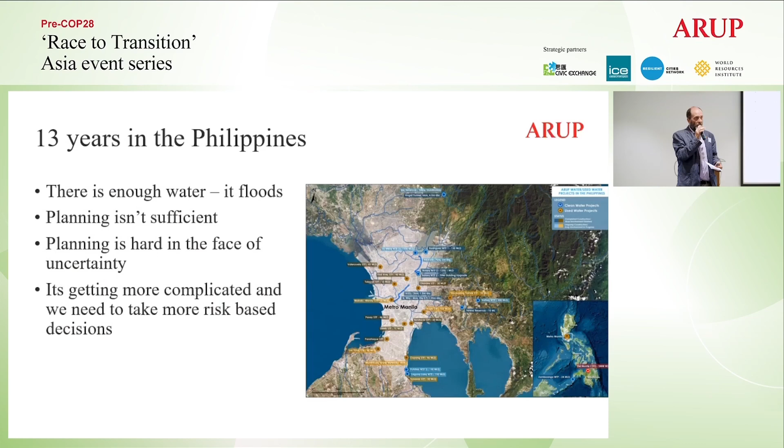It's getting more complicated as we move forwards. The risks are harder to understand, and how we plan our way through that is where I think we can make a real difference. Our work is changing. This image shows a number of projects we've worked on all over Metro Manila and outside of it in the Philippines. But the work is changing, and we need to be doing different things. That's partly why we have everyone here today, to discuss that.

So, what is water, what could water be, and where has it taken us? We know that water does more than just water - it can be a source of energy, sludge processing, pineapple processing. I have that up because we worked on another project in Mindanao a few years ago, and I know Dietmar knows this one very well. Mark did a presentation at Stockholm Water Week about 10 years ago where he described the water cycle and how we generated energy, describing Sven the woodcutter, who somehow ended up in the Philippines generating energy from pineapples. I hope his presentation tonight doesn't repeat that one, but it should be of that sort of nature.

But are there other options? Could we use it for hydrogen production? So really, what is the total value of water, and how do we use that in a fully integrated way? And what we're going to do now is look at where this vision could take us.

I hope this isn't Manila Bay, but hopefully in a few years' time, the long-term vision would be for Manila Bay to look like this, somewhere we'd be happy to go. I've just got back from Singapore, and you're very happy to have a drink by Marina Bay. We don't have that in the Philippines, and I think that's what we'd be looking for if we get all this right - a fully working environment fitting for something we can make the most of.

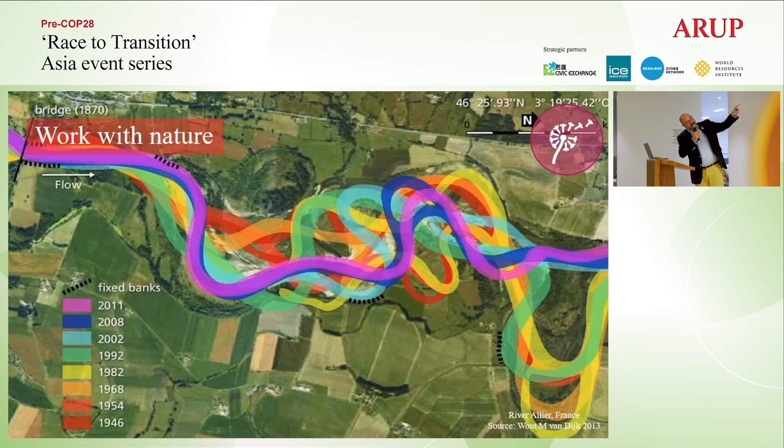And I love this slide because this slide shows that in terms of working with nature, this is showing the meandering, or how meanders have evolved over time and how dynamic nature is. So from my perspective, I'd say that the more that we work in tune with nature, and with nature, then the more nature is our friend. Nature's part of the solution.

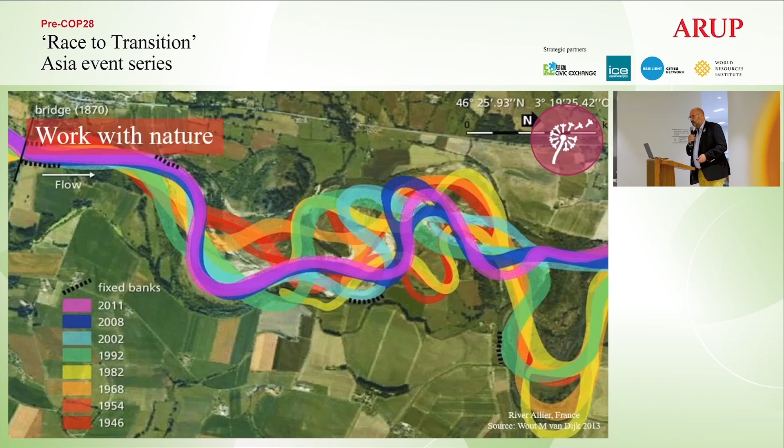So an absolute fundamental. When I was at COP26 in Glasgow, I was talking to this lady next to me on my right, and she was working with local farmers in China who were picking the seeds from those crops that thrived when there wasn't very much water or when there was too much water. And then she would collect those seeds from a village perspective, and those villages would then be collected from a town perspective and then from a city perspective, so that they had this sort of national seed bank of increasingly tolerant species that could adapt to the extremes that we're experiencing.

I thought that was an interesting perspective, and I wouldn't have found out if I hadn't been a guest at the Chinese pavilion. There weren't any non-Chinese people who would have gained that insight unless they'd been there in the pavilion at that time.

What's the other important thing? I think it's how we value our environment, or how we look at the economic frameworks in which we operate. There's multi-capitals frameworks or total value frameworks that think more about things like social capital, natural capital, or manufactured capital, rather than the way we've historically made decisions. I think that's fundamental.

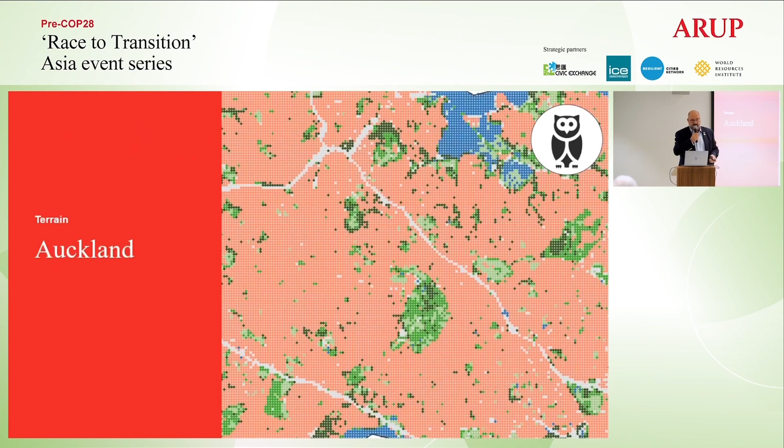Auckland came at the top of the ranking and London at the bottom, giving a sense of the sorts of things we were looking at and the data we were using. You can imagine that if your entry point is the Sponge City snapshot, but your final point is a drainage master plan to tackle a problem, there might be something in it.

Let's think about resilience to too much water, too little water, or water that's too polluted. We developed a framework called the City Water Resilience Approach with the Rockefeller Foundation and the World Bank. It basically involves understanding the city, prioritizing or doing a maturity assessment on how resilient it is, and then doing a governance model across the water cycle using an open source, free to use water governance tool. This gives you a sense of how you start to understand the system and map it with that tool, and then how you start to assess it against standard, universal indicators around the world.

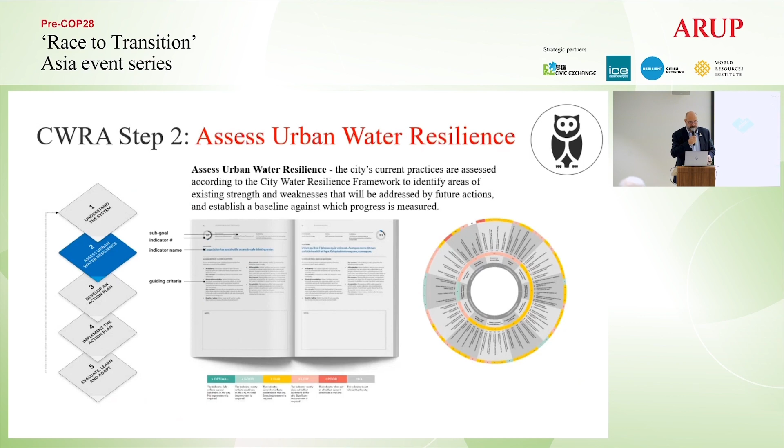Interestingly, one of those cities was Cape Town during Day Zero. When Day Zero was announced, the idea that the city would run out of water, it triggered a behavioural change in the way people used water, resulting in a 30% reduction. Another interesting finding: by planting non-native trees in Cape Town, they were consuming 55 billion litres of water a year, equivalent to 2 or 3 months of their annual consumption.

Probably an unintended consequence of working with a lack of knowledge of that indigenous forestry or vegetation, but an easy win if you really want to look at catchment scale and benefit for the city.

So I'll finish on integrated water management and how we shift from working in silos in all our respective authorities, all well-intended, into something more integrated, and also more integrated with local people, traditional owners and indigenous people. Our framework, designing with water, is about rethinking assets, rethinking stewardship and rethinking value, very much along the lines of the total value framework I talked about earlier.

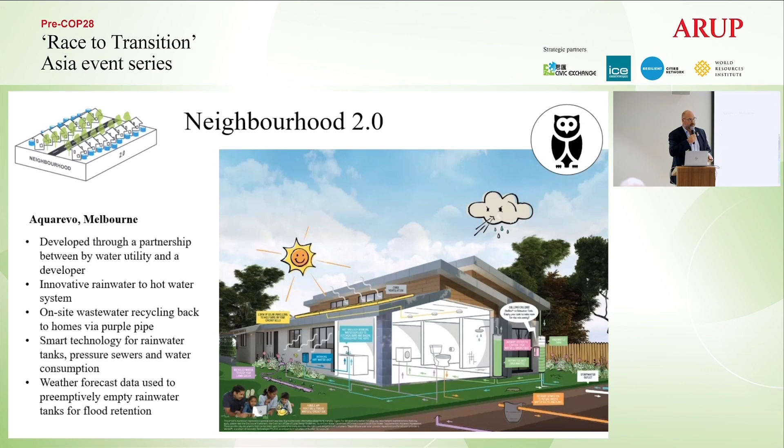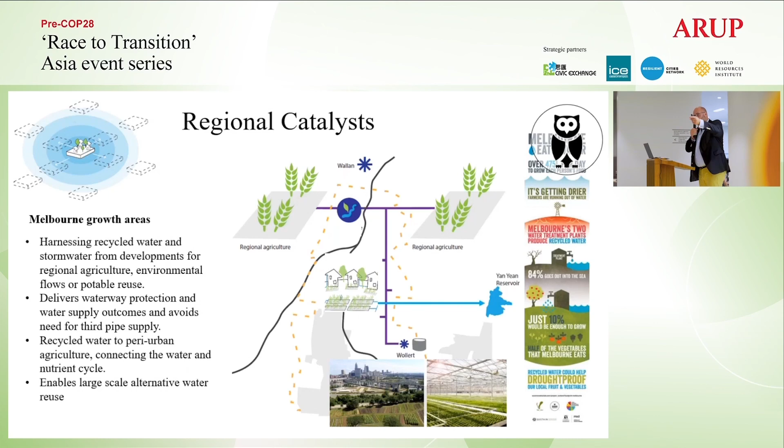One of the neighbourhood scale initiatives is Southeast Water working with developers. They're not just looking at how you manage demand from a house perspective, they're looking at how you manage demand from a group of houses from a development perspective. Or here in Western Sydney, how you take that scale up and use villages to regenerate and think in a more integrated perspective around water cycle management. And this is the work in Melbourne, looking at regional catalysts and how we look beyond just the developed space into the catchment and things like agriculture and food production.

So that sort of concludes what I wanted to share with you. I thought this was at Stockholm World Water Week earlier this year, and it's Johan Rockström again. It's this fundamental thing that sustainable development's at the heart of everything we do. And if we fail on the climate, on the Paris Climate Agreement, we also fail on the Sustainable Development Goals.

But remember, the United Nations have said over 90% of the impacts of climate change are felt across the water cycle.

I think that's why water's absolutely fundamental to what we're doing around climate change. I hope I've just got you thinking a little bit more, maybe shared a bit of my experience. But this isn't a challenge for people in the corner. We all have a role to play. We're that generation where we've realised that climate change is happening, and we're the first line of defence. And I think we'll be measured by what we've done by future generations. Thank you.

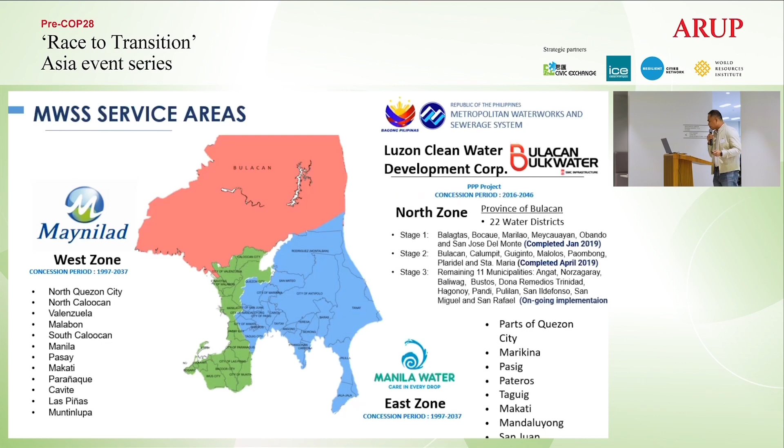So this is the distribution of the concession. Just to show you some of the accomplishments of Manila Water since 1997, since the privatization, the concession has been very effective in their water and sewerage services. For the non-revenue water, it went down from 61% to 28%.

That's a high drop in non-revenue water. And for the population served, it went from 5 million up to 17 million, with water supply coverage increasing from 48% to 94%.

For the water sources, right now we're dependent on one single water source, which is the Angat Dam. We're getting 90% of our water from Angat Dam, 8.5% from Laguna Lake, and for groundwater outside Metro Manila, that's 1.3%.

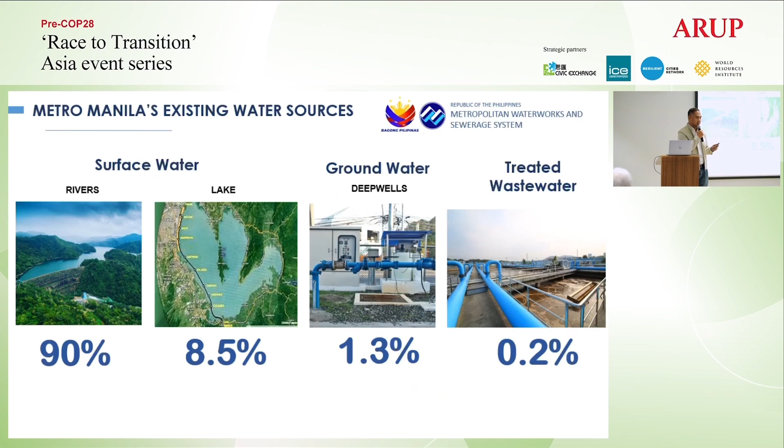Our concessionaires are now venturing into treated water because we're now treating the wastewater. Instead of discharging it to nearby bodies of water, they constructed a new process to make it potable, passing it into the Philippine National Standard for Drinking Water, and tapping it into the distribution line. Right now, the new water plant in Parañaque has received a lot of international awards.

For the existing and planned raw water sources, we break it down into 4 systems. As I mentioned, the existing water source system right now is Umiray, Angat, Ipo, La Mesa, and the Laguna Lake system, which is the Putatan. Right now there are 2 ongoing treatment plants being constructed, one in Poblacion, located in Muntinlupa, and another in East Bay of the Laguna Lake.

For the Wawa Tayabasan system, the existing facility is the Tayabasan Weir, and ongoing right now is the new Wawa Dam project. I think Arup is one of the consultants of this project. And of course, one of the biggest water supply projects we are constructing right now is the Kaliwa Dam project in Daraitan, which is the proposed one. I'll deal with the details of this later.

So just wanted to show you a virtual tour of the existing water supply system of Metro Manila. Angat Dam, as I mentioned, 90% of our water we get from Angat Dam. We also have facilities upstream of Angat Dam, which is this one, Umiray.

So we constructed a weir in the middle of the Sierra Madre mountain range, and a 14 kilometer tunnel around 4.3 meters in diameter, which augments water to the Angat Dam. Angat Dam is being operated by the National Power Corporation, and we're sharing the water from this dam with the National Irrigation Administration.

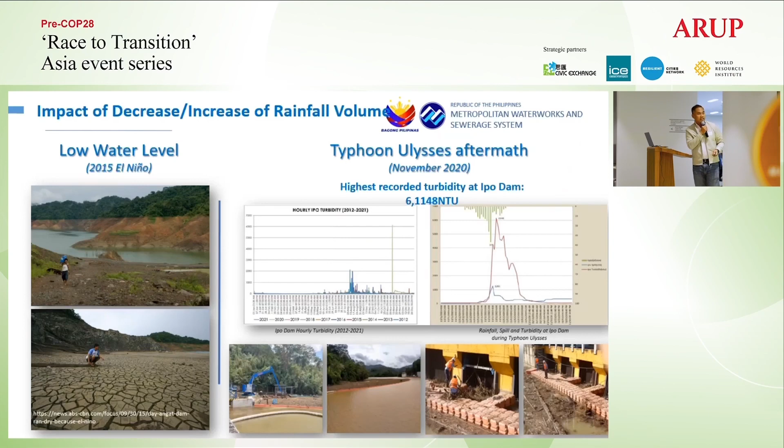And there's a lot of trees, logs, and debris in the watershed causing clogging at the intakes. And if you remember the 2019 water shortage situation, this is what happened, where the La Mesa Dam was drying, Angat Dam was drying, and also we were experiencing a lot of algal blooming or eutrophication in the Laguna Lake.

That's why the effect is there's a lot of customers lining up at the street to get water. So aside from that, we have these challenges in implementation of the water sources here in Metro Manila.

One of the main issues that we are experiencing is the permitting works. Most of our projects are constructed in a watershed area, and some of those areas are located in an ancestral domain. Here in the Philippines, we have this IPRA law, or the Indigenous People's Rights Act, wherein if the project is located in an ancestral domain, you need to get a certificate of precondition from the IPs. So we need to conduct the free, prior, and informed consent process to get this certification from the IPs.

Actually, for your information, for the Kaliwa Dam, we got this permit from the IPs after around 7 years. So that's a very long journey of getting this permit.

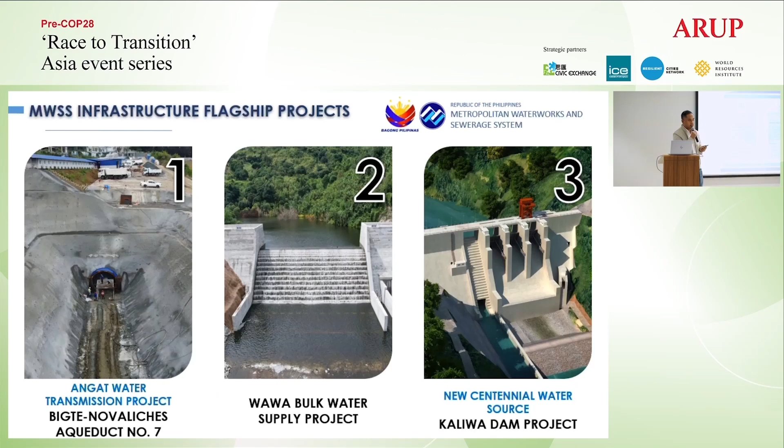And these are the water security pillars of MWSS. These pillars were created when our administrator, Leonor Cleofas, entered as administrator. So we have projects like re-engineering of raw water sources. As I mentioned a while ago, we have these tunnels and aqueducts, and we are repairing the existing facilities.

And part of it is the repair of the losses, because these structures are really old now and we need to repair those systems. So for the existing transmission line right now, I think the losses based on our water balance are around 200 million liters per day. That's a lot. That's the one plant already in Putatan.

And for the short to medium term water sources, that's with the help of our concessionaires, Maynilad and Manila Water. Since constructing new water sources is very hard, as I mentioned a while ago, we're getting permits for 7 years and the construction is 5 years. So we need to implement these short to medium term water sources, and these are the projects that the concessionaires are doing right now.

And for the long term water sources, because we have 90% dependency on Angat Dam, we want to lessen this dependency. As I mentioned a while ago, Angat Dam is around 4,000 million liters per day, and Kanan Dam is 3,000 million liters per day. So we want to lessen those dependencies on this dam.

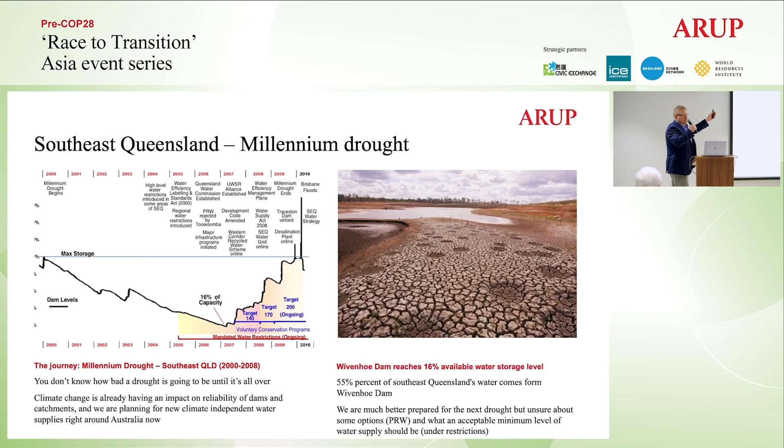We come back to acceptability. We took those levels of service - what is the current frequency and extent of water restrictions, and is that acceptable? The important thing to note is that the demand lines go up. We saw increasing demand lines before, and we all know that the demand on our system is going to increase.

But you can see on both of these graphs now, lines that are starting to drop off and decline. That's what the supply or reliable supply of our systems is doing all across the world. When we apply new climate projections - higher temperatures, higher evaporation, longer droughts - you see the performance of the system decline. It means our dams are becoming more unreliable. You could draw pictures like this in every capital city, every place.

So what does that actually mean? It means that reducing demand becomes so much more economically viable. Every drop saved really does make a difference - for the environment, for bills, for costs, for drought, for reliability, for resilience.

This is our drought response plan. It relies on us using desalination and a recycled water scheme, so it actually becomes very, very expensive to run the water supply system when the drought progresses. But resilience is what's really changed our thinking.

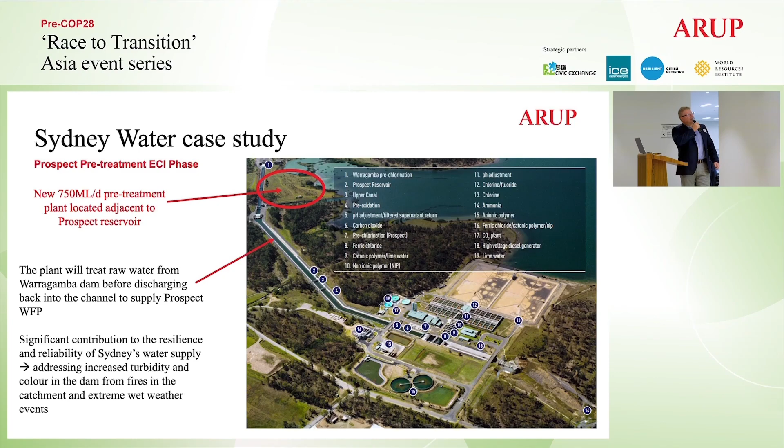This best practice adaptive planning is actually where I think that as water utilities we need to explore.

What are some of the likely options that we can protect against change? We don't know what the actual demand is going to be for water because we don't know what the energy sector is going to demand, what new technologies will reduce residential demand, or what the Olympics in Brisbane might look like in 10 years' time. We're past the luxury of planning 20 years ago when we just drew straight demand lines. It's uncertain, and so are the options open to us.

At the moment we can't do recycled water, but in 5 years' time we can. So how do we need to protect for that? What conversations do we have to have with our policy makers and our community to make sure that maybe one day we can use recycled water, like the great conversations you've had here starting to use recycled water.

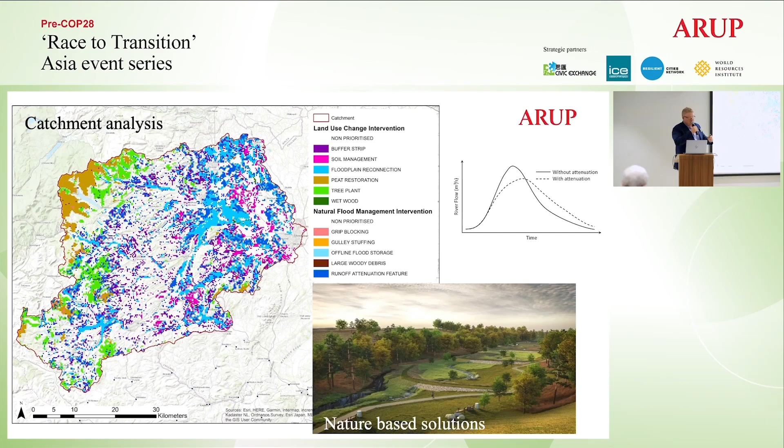For me, there's so much we can do upstream in catchments. It's very hard to justify the price in our current economic frameworks - regulators want fixed outcomes and definable costs. But we've shown around the world that investing in remediating and investing in catchments or upstream river systems has so much benefit downstream. We're starting to see new economic assessment tools and business case frameworks that recognise the advantage of investing in catchments rather than grey infrastructure - big tunnels, big pipes, big desal plants.

This is just one near me where I live - a small river system. In the flood we had earlier this year, this whole thing was washed away. But it has created a protected open space. The water did get away, it wasn't damaged, it served its purpose. It hasn't been built out, it's not going to be urbanised, and it has increased the biodiversity of the area. It's our natural capital, in our park in Brisbane. I think projects like this are testament to what water companies can do when they talk to local communities and customers to co-develop and co-design solutions where they live.

Thank you for having me. I hope that was useful.

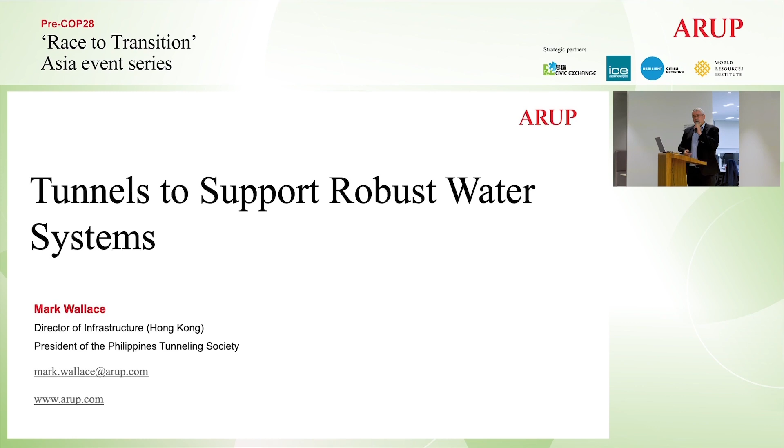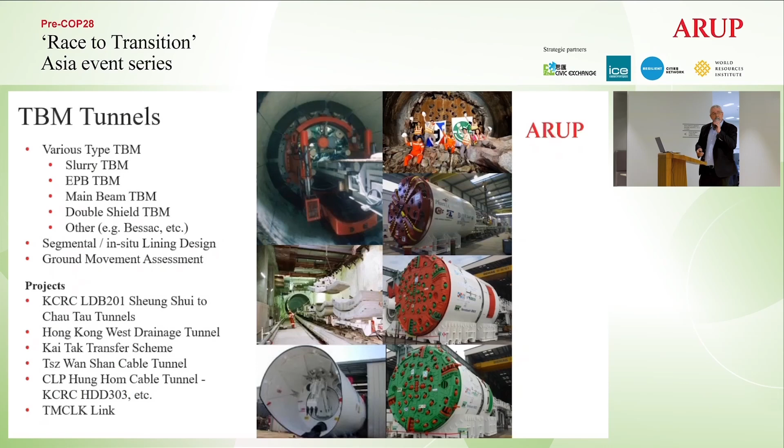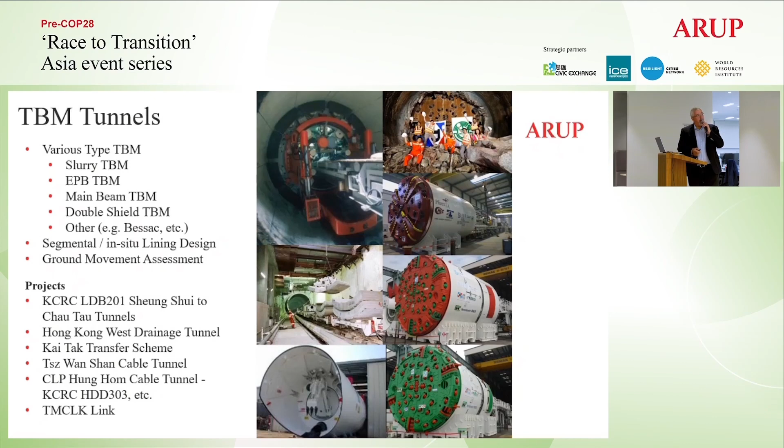Just to run through some of the techniques we normally employ when looking at tunnels - how we connect our dams and reservoirs to our water treatment works and sewage treatment works. TBM tunnels, mechanized tunneling, is the common norm these days. We have different types of TBMs used for pipes and tunnel conveyance systems. For us, the important aspects are how much space you have and the ground conditions - the selection of those things is very important when thinking about how we do different types of tunnels.

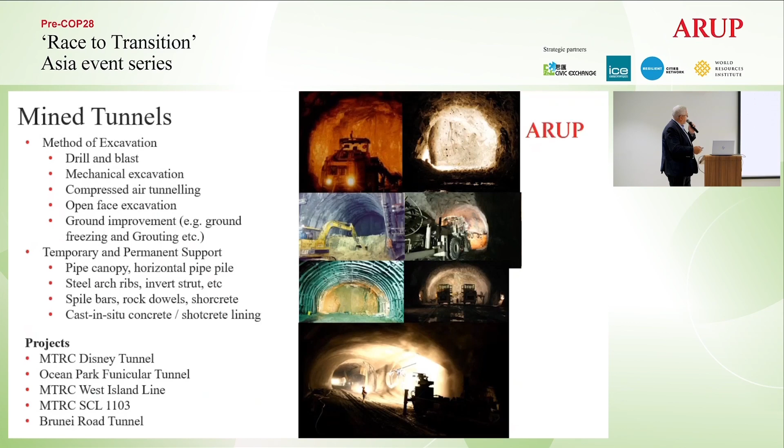Mined tunnels are the other type - this is where we're actually excavating in the ground. We can use drill and blast methods, mechanical excavation such as road headers, and so on. Again, this is another method that's used frequently when looking at how to create tunnels and connect things through the underground.

Caverns are actually a trend in the world, where people are looking at how to create spaces to put in things like sewage treatment works. Quite commonly these days, people see sewage treatment works as NIMBY facilities, so certainly in Hong Kong and other Scandinavian countries there's a move to transfer these facilities underground, because they have a blighting effect on nearby communities. Putting them into caverns or covered facilities is certainly the trend globally.

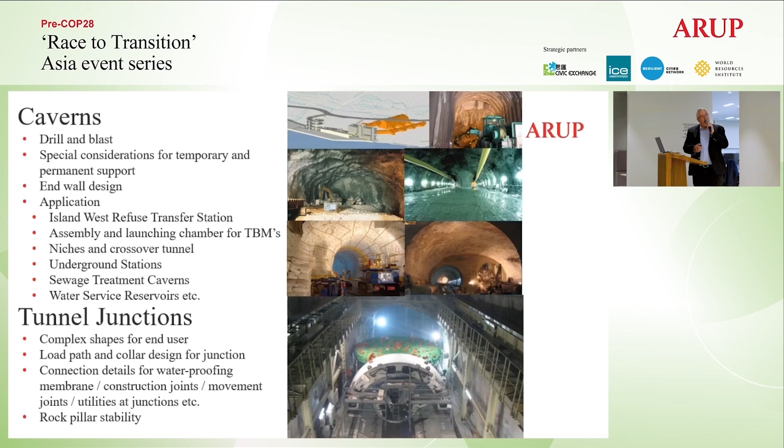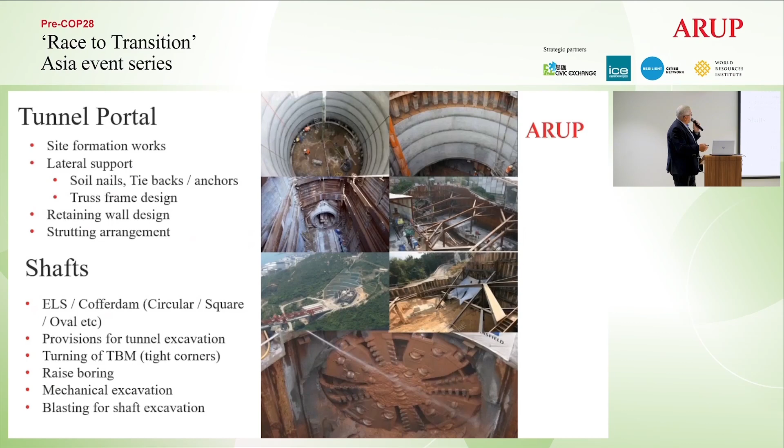And then really the most important one for urban areas is looking at micro tunnels. There's a wealth of different techniques: pipe jacking, horizontal directional drilling, and the technology in this area is improving significantly, becoming more reliable in terms of settlement control, and providing a more robust and better solution for installing pipes in dense urban areas.

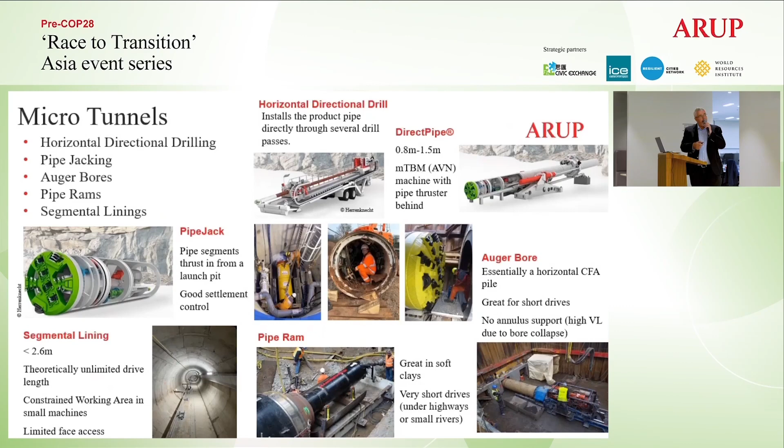I'd like now to give you some examples of water tunnels we've done at Arup. This is one we've just completed recently, the NBAQ4 tunnel for Manila Water. About 2 or 3 months ago we did a 1,000 MLD test. This tunnel is now operating successfully, and we're very proud to have been part of that journey with Manila Water.

This project has quite a significant history in terms of using tight radius TBMs, because you need the horizontal alignment to navigate corners and stay within government areas, without imposing on different right-of-way issues. This was quite unique - the TBM had an 80-meter radius, and we went within 2 meters of MRT7 piles for the railway line. Quite a challenge, but it's successfully operating now, taking the intake to a low level within La Mesa to aid water security for the Balara water treatment works.

This is another one in Hong Kong. You probably saw in the news 2 or 3 weeks ago, Hong Kong had a 1 in 400 or almost 1 in 500 year storm, and all the rain that dumped on the territory caused severe flooding. Within 1 to 2 days the city got back to normal, and it's because of systems like this, installed a few years ago, that they were able to recover so quickly. This is a flood prevention scheme. Waterloo Road did flood, but the tunnel's designed for a 1 in 100 year return period, not 1 in 500, so it performed quite well considering.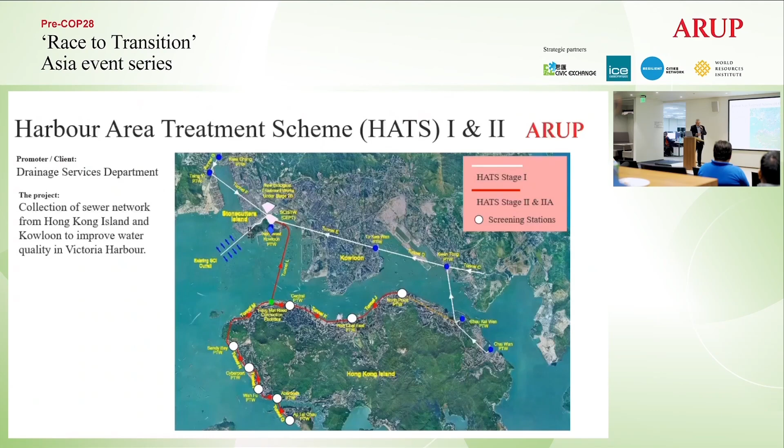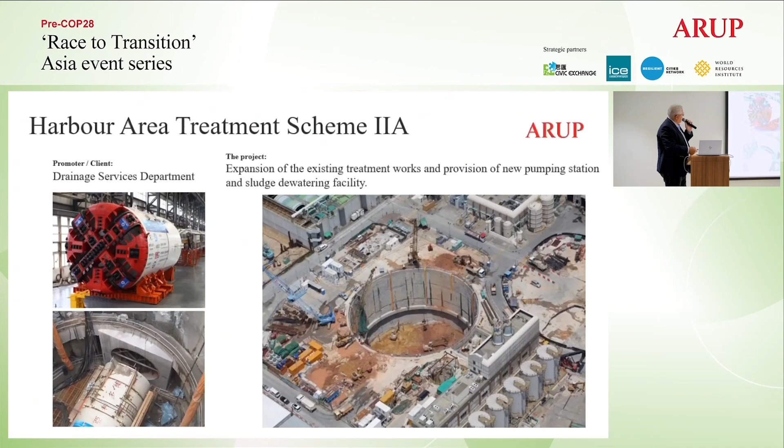Arup were involved in various aspects of this for contractors, looking at this deep tunnel system and the deep shafts used to convey the runoff and sewage that was usually dumped into the harbour. At the Stonecutters treatment facility, we were involved in doing some pipe jacks and launch shafts for an outfall, and also for new pumping stations.

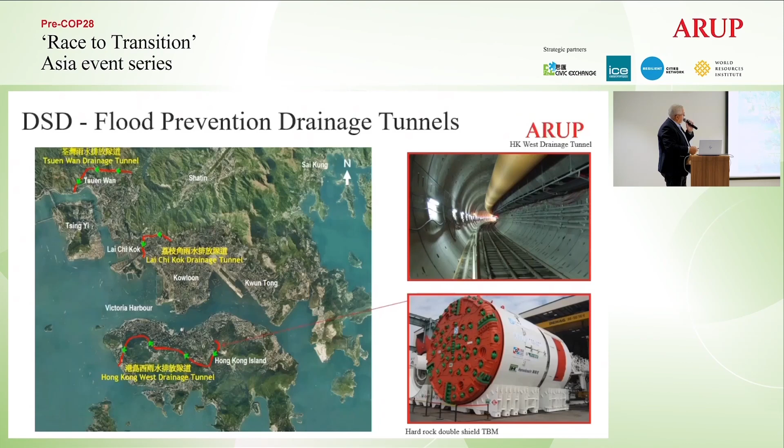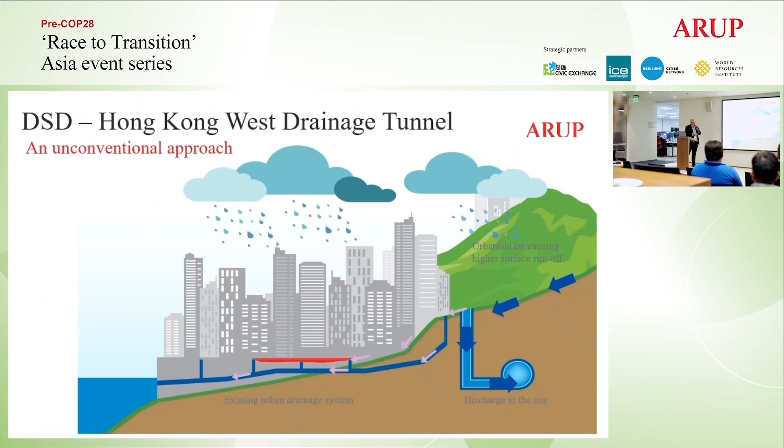Another project Hong Kong has done is flood prevention drainage tunnels. I was involved in the Hong Kong West drainage tunnel, about 10 kilometers, with 2 large TBMs picking up the runoff from the hillsides before it hit the urban areas. The concept Hong Kong put together was to capture this to alleviate flood prevention - the water from urban areas with reclamation would basically be captured in this tunnel scheme before it went down. This performed very well in the last storm.

One concept we put together, which saved quite a lot of time and money, was a TBM tunnel with concurrently drilled and blasted adits, and then a raise bore which formed the shaft - some of these were up to 100 meters deep. This saved a lot in terms of mucking out and shaft construction in very tight areas in the middle of the urban area.

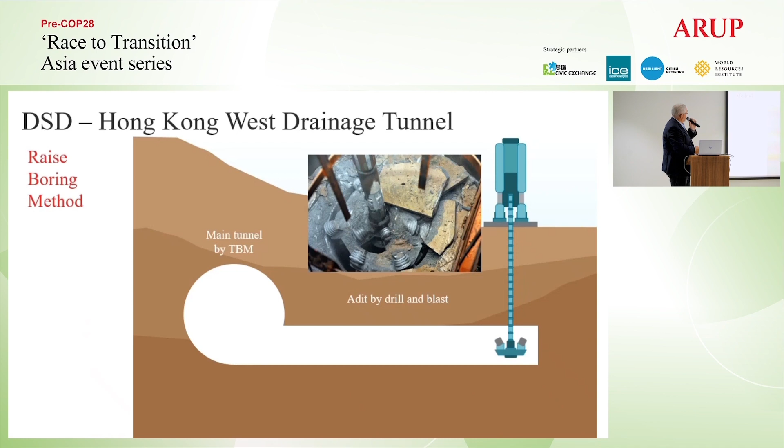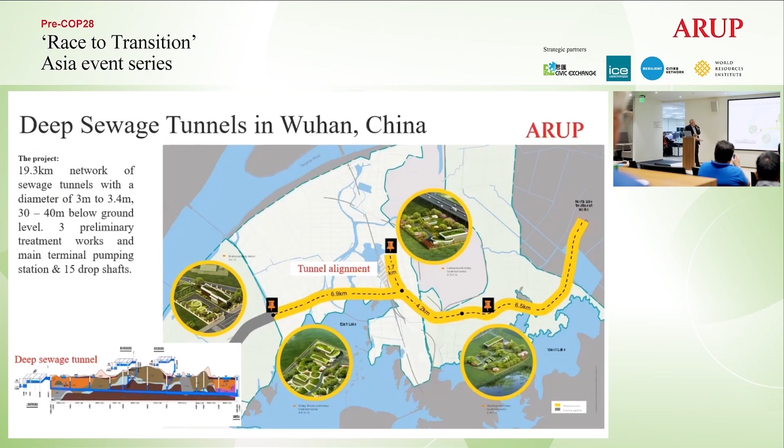So some of our experience we've applied in Wuhan. It's a similar sort of deep tunnel sewage scheme that was put forward, and we did reviews on design of that, just to make sure that the hydraulics and the schemes were going to be designed well and actually perform well.

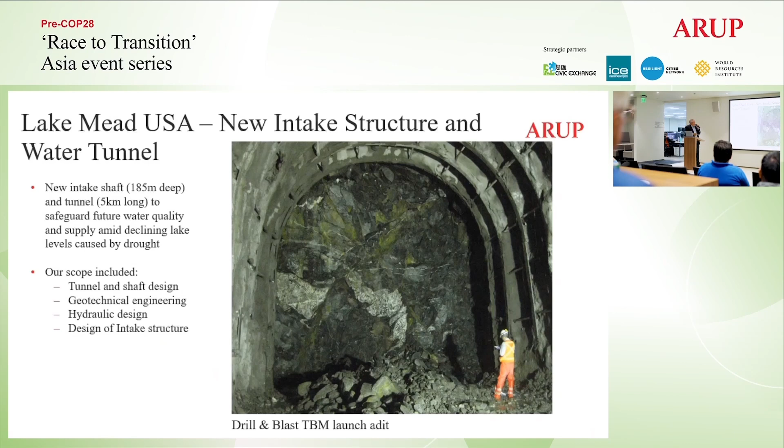And then an interesting one that we did in Lake Mead, again, this is about climate change. This is about making the invert level lower for the takeoff for the Lake Mead, which is connected to the Hoover Dam, and how to maintain water supply over the long term.

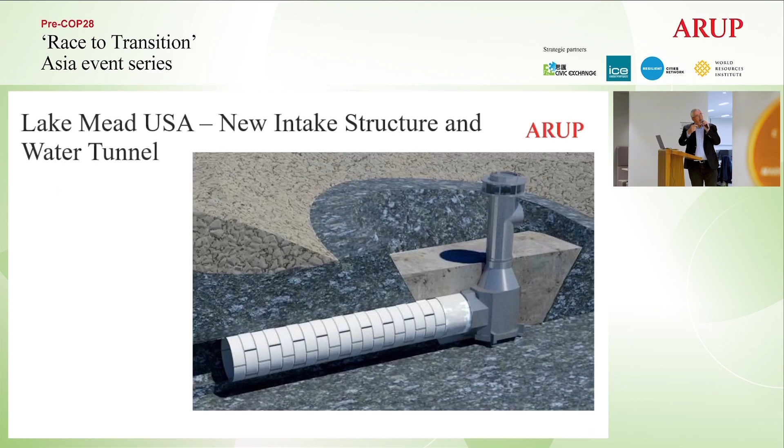Here we were looking at a new intake structure at a very low level, about 185 meters below the top level of the lake. We had to do underwater blasting to take the excavation, and everything was done underwater.

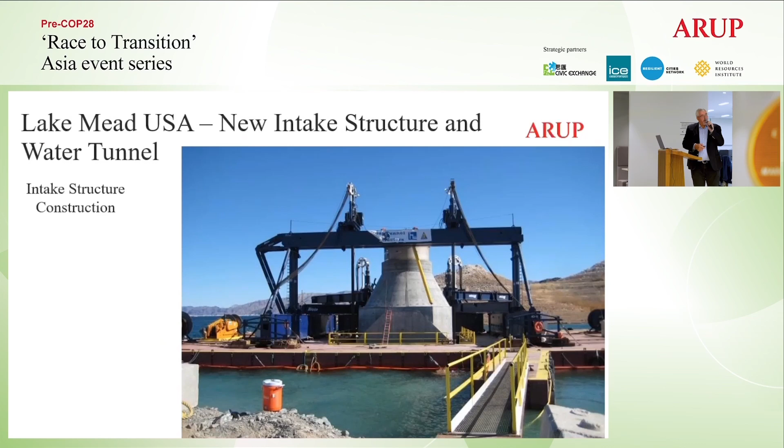So this was the intake structure constructed on the barge and then lowered down into the lake. And then the TBM came in, and there was a specially designed bell that would allow the TBM to enter the intake structure, so that they could then dewater that and work inside the bell to make everything watertight and keep everything secure.

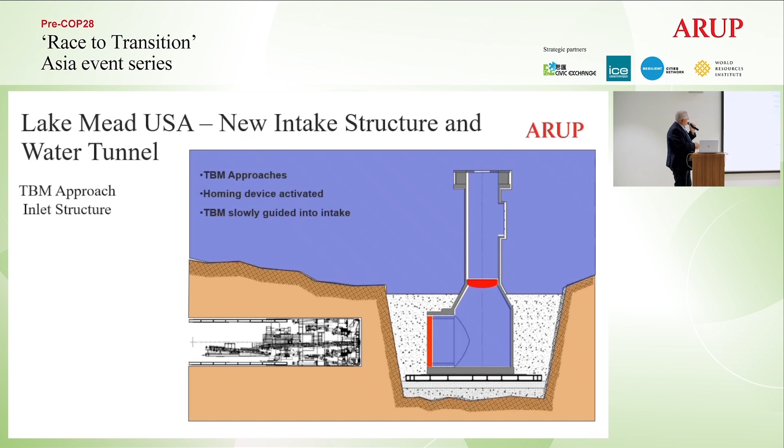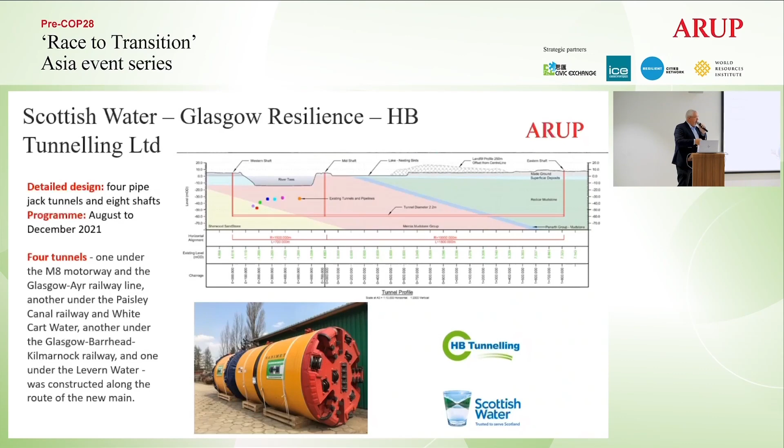And this one is to highlight the sort of common problem you're getting in urban areas about how much congestion you have in the ground. And actually, as development continues, you find that you have to go deeper every time because the existing congestion pushes you down to ever deeper depths.

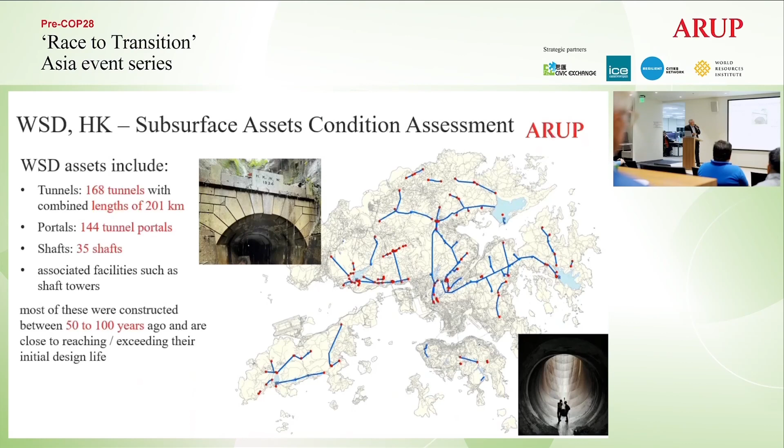And this is one we're doing just now in Hong Kong, where we're doing an asset survey of about 200 kilometers of tunnels in Hong Kong, 144 portals and 35 shafts. This is part of an ongoing inspection routine that we're doing over about 3 years to check all of these previous tunnels and basically do assessments of what the condition is like.

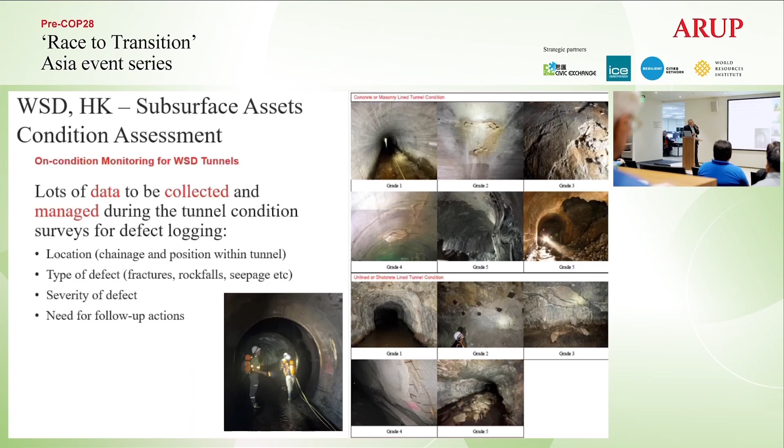So we've set up a sort of routine and procedure to collect the data, to be able to manage that data, classify it so that we can find the defects, so that we can actually come up with a plan on how to change those and repair them. So we applied digital solutions in doing that.

So obviously for water companies, asset management and that type of thing is very important. So we've developed these sort of in-house schemes to try to manage this inspection process over the next couple of years. So that was all I was trying to put to you, some examples from overseas, so that you can see what we've been doing and maybe some of the solutions that might be appropriate for Philippines. Thank you.